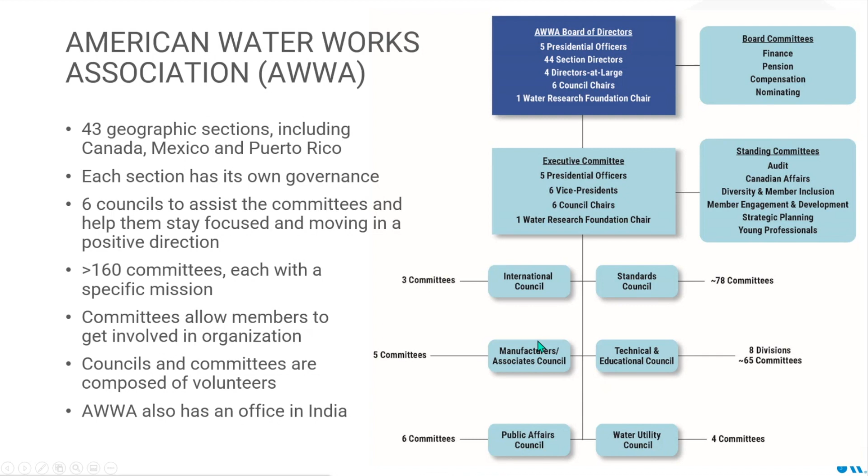We have the Water Quality Division and the Water Science and Research Division. The committee is actually shared between those and reports to both.

AWWA committees are there to develop what we call work products. It's an opportunity for AWWA members to be involved as volunteers. What we do is prepare conferences, workshops, sessions, webinars, webcasts, and also journal articles. AWWA has three publication venues.

It has Water Science, which is peer-reviewed. The Journal of AWWA is perhaps the oldest one, but is no longer peer-reviewed, so it covers broader topics. And Opflow is also not peer-reviewed, and it's more at the operator level.

AWWA also develops manuals of practice. These practices are a comprehensive review of a specific topic. I pulled one out here—this is the Water Quality in Distribution Systems manual, M68, and this one we're going to start reviewing pretty quickly. It's a pretty decent manual, actually. I think this one turned out to be about 400 pages, if I'm correct.

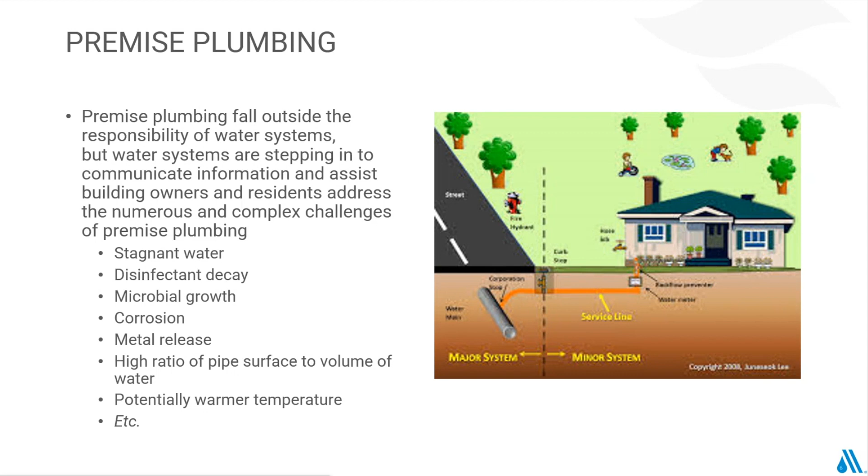But water systems are going to feel compelled to help building owners and residents address the challenges they encounter in their premise plumbing. We know these challenges are multiple, including corrosion, microbial growth, metal release, and so forth. To address this, AWWA developed a policy statement and started the Committee on Premise Plumbing.

You can access the policy statement here. It was adopted fairly recently, and it basically emphasizes collaborative work among everyone and the organizations responsible for ensuring water quality in premise plumbing. It's also there to encourage water systems to inform and educate property owners and water consumers.

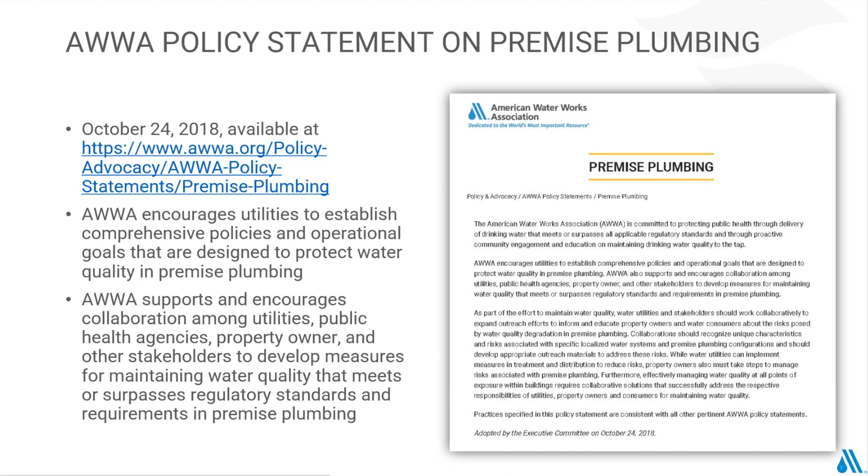The Premise Plumbing Committee was the second thing that AWWA did, and we had our first meeting almost 4 years ago. We have over 120 members right now representing different parts of the industry. We are at our second version of the mission statement: to synthesize industry knowledge and convey information that improves building water quality.

Some of the topics we have addressed are how to control pathogenic microorganisms—Legionella, of course, was the first one we worked on. We also look at improving control of inorganic contaminants in premise plumbing, how to remove accumulated inorganic contaminants, and how to address water quality in hot water systems. This is something we're starting to look at.

How do we handle premise plumbing, recognizing that it falls in the part of the system that is not owned by water systems? During the COVID pandemic, we also got quite active looking at what's going to be the impact on change in water flow in buildings, considering the work from home moratorium. So we developed some work products as part of that as well.

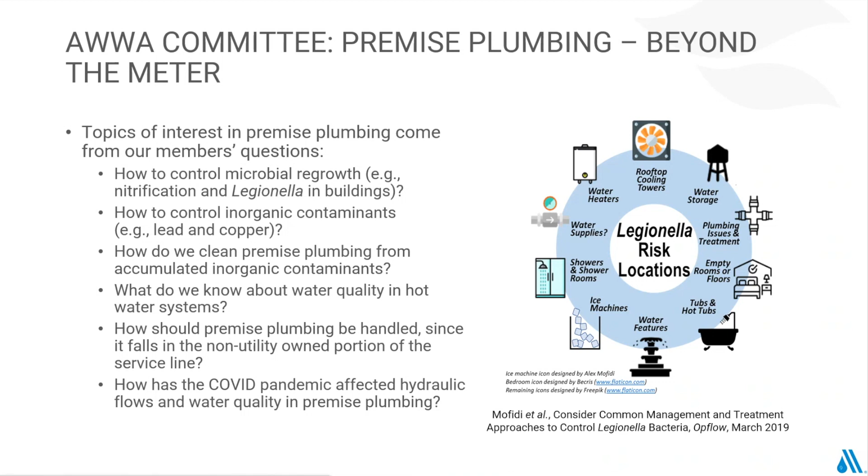I'm going to go over some of the work products we've prepared. One of the first things we did was a suite of 3 articles in the Opflow publication, which is more geared toward operators. They were published in early 2019, separated into preventing diseases and addressing the shared responsibility, looking at management and treatment, and also unintended consequences for Legionella growth.

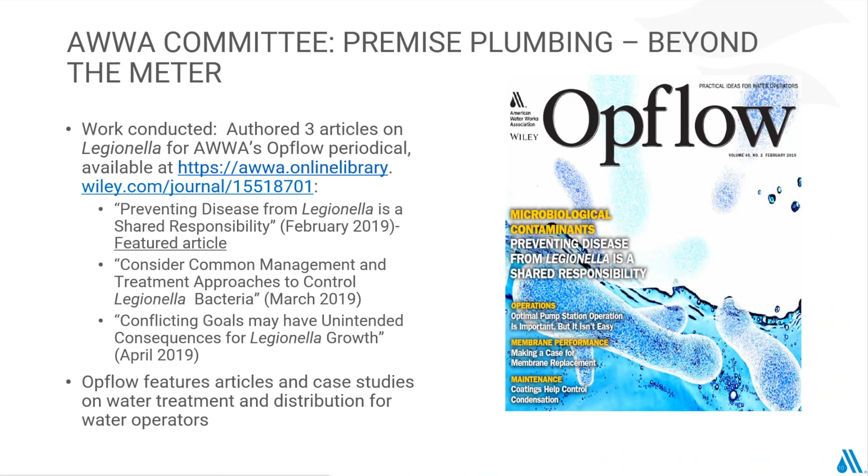Interestingly, AWWA actually won an award for this suite of 3 papers—the Apex Award, given to them in early 2020.

Something else we've done is at 2 of AWWA's annual conferences, which is AWWA's biggest venue, with about 10 to 15,000 participants—fairly large conferences. What we did is started as poster sessions, but we made them like lightning round poster sessions.

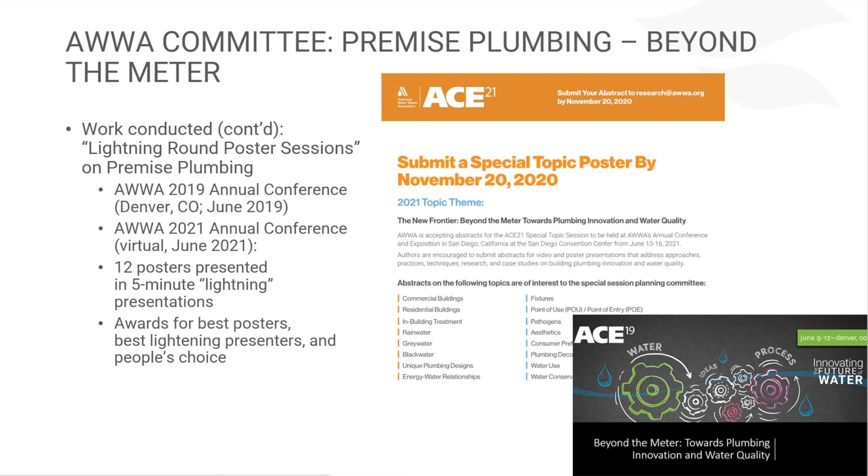We had a fairly large number of posters, but we selected 12 of them that were also allowed to give a 5-minute presentation about their poster with a Q&A session. That was quite interesting, and we gave awards. It was very interesting, especially for students and young professionals, and was well attended.

We have a number of subcommittees or work groups working on very specific topics that pertain to premise plumbing. The lead in water subcommittee was the first one created. The copper in water subcommittee was also created, in response to the revisions of the lead and copper rule.

To the right here, you see some pictures of a paper published by the Copper in Water subcommittee earlier in the Opflow magazine. The Lead in Water subcommittee is also going to have an article coming out in the January issue of the Journal AWWA.

We also have a subcommittee looking at building disinfection. Another subgroup of the committee worked with IAPMO to develop a manual on safe closure and reopening of building water systems.

We also have two groups starting to look at building water system operator certification, evaluating if this is needed, what is happening elsewhere in the world, and if needed, how do we go about developing such operator certification—what would be the advantages and what would be the drawbacks. That's another thing we're working on right now.

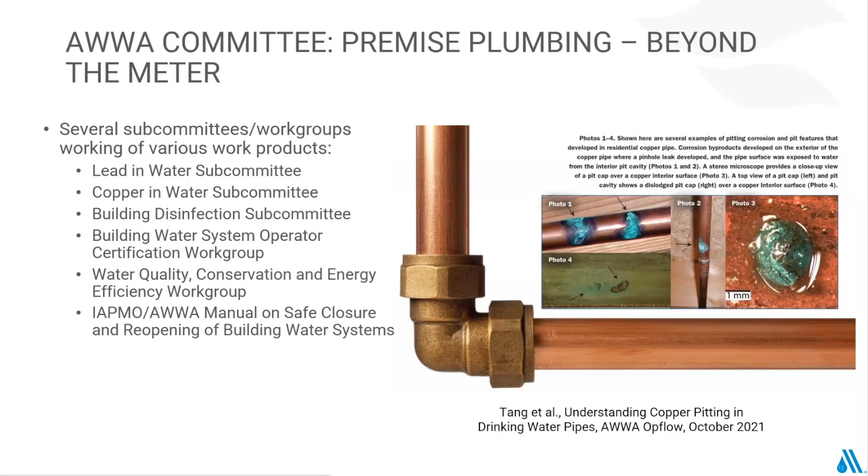We are also reaching out to other organizations to look at the nexus between water quality, conservation, and energy efficiency. There are a lot of organizations working on each of these topics separately. Some are starting to tackle conservation and energy, but oftentimes the water quality aspect is dropped out of the equation. So we want to make sure this stays on the radar screen of those groups, and we're engaging in discussion with some of these organizations.

Our committee actually meets every other month, so we have about 6 meetings per year. We try to have a guest speaker at each committee meeting, and most of the time we are able to have one.

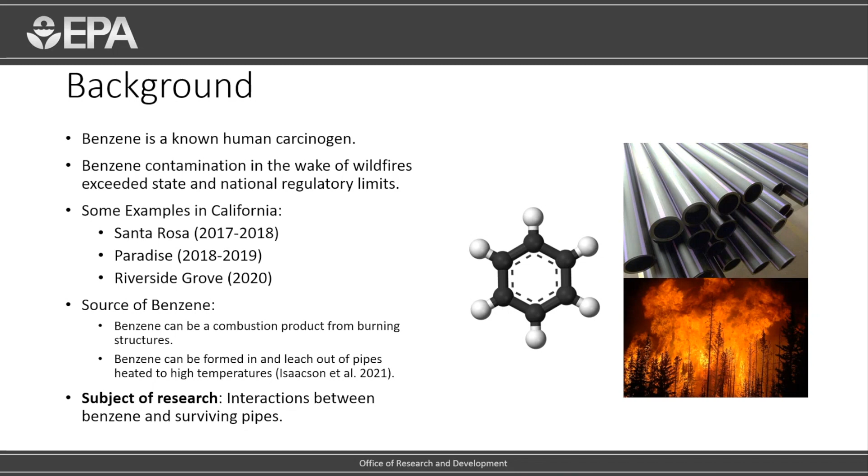But that's not really the focus of my presentation today, which is what does the benzene do, how does it interact with plastic pipes once it is in the system. One of the things that benzene does in contact with polyethylene is that it permeates it like the polyethylene is a sponge. Benzene doesn't just stick to the surface, it actually penetrates the polymer of the pipe wall. A benzene molecule can conceivably wiggle its way through the polymer strands all the way from the inner surface to the outer surface of a polymer pipe.

Why is that important for premise plumbing? Well, for instance, service lines are commonly high density polyethylene, and a lot of internal building plumbing now is cross-linked polyethylene of various flavors, called PEX.

Some of the consequences of this benzene diffusion into the polymer is that this process is kind of slow compared to, say, remedial actions like rapid flushing. That means a quick, couple-minute flush can strip benzene off of the surface of the pipe, but there can still be a considerable amount of benzene deep inside the pipe wall waiting to come back out.

As a corollary to this, besides just affecting decontamination, this also affects sampling because, for instance, if one were to draw a sample from a pipe that was just recently flushed, that sample might come back non-detect, even though there might still be plenty of benzene left in the pipe.

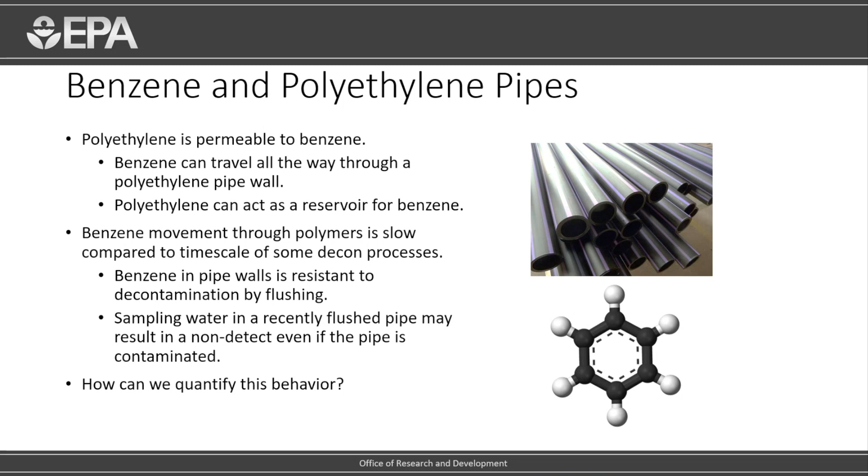So is there a way we can talk about this behavior more precisely? Recently, we've been doing some experiments at the testing and evaluation facility at the EPA with sealed pipe segments, which isn't really representative of a distribution main out in a system which is constantly flowing. But in a lot of places in premise plumbing, or even on the service line to premise plumbing for sparsely or periodically populated buildings, which were and are sort of common during COVID, we can do experiments with sealed pipe segments like the one pictured here.

The gist of the experiment is to fill up the pipe with some contaminated water and let it set for a couple of weeks, which is what might happen if a community is scorched by a wildfire, or if some contaminated water enters a building that's been evacuated.

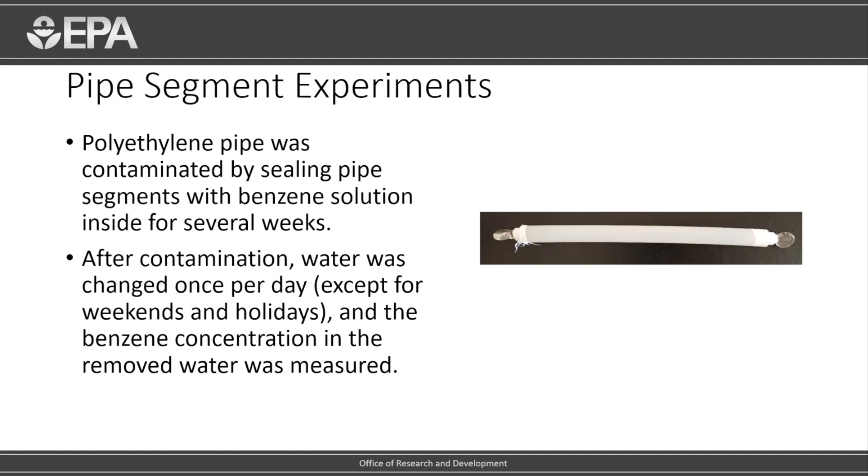After this contamination period, the contaminated water was removed from the pipe, and then pretty much every day, except for weekends and holidays, we filled up the pipe with fresh water and let it set for a day or a weekend, then discarded the water, rinsed it, and captured the water inside and measured the benzene concentration. So the first result I want to talk about is the difference in benzene uptake between a stainless steel pipe and a high density polyethylene pipe.

At the end of some weeks of absorption, of contact with the pipe, like 8 weeks, the decrease was only 4% for stainless steel. So is there absorption, or maybe just a little bit of volatilization? Either way, not much of the benzene went out of the water.

Contrast that with a high density polyethylene pipe, which absorbed most of the benzene that was in the initial contaminant solution.

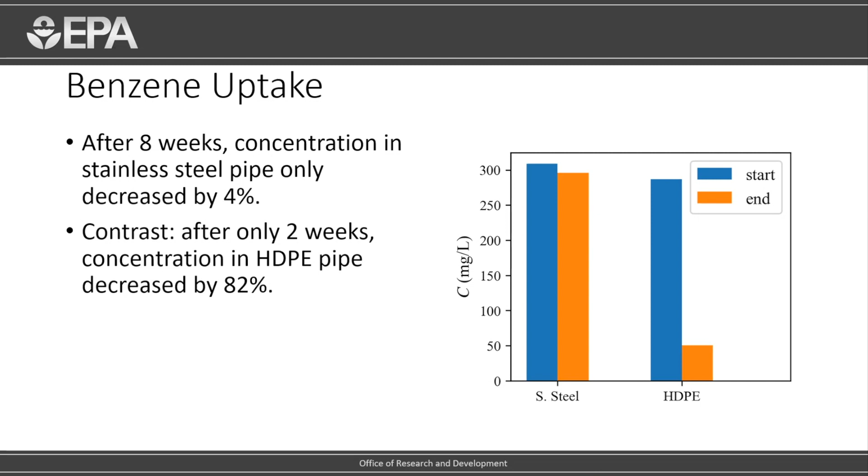So then what did the sequential stagnation and extraction curve look like? Well, there was practically zero desorption from the stainless steel pipe. However, there was plenty of desorption from the high density polyethylene pipe.

You can see even after like 15 rinses, we're still above 400 times the federal MCL on this particular pipe. Granted, we started with like 20% of the aqueous solubility of benzene, and the wildfire samples were only, I think the biggest sample I saw was in the 2 to 5 milligrams per liter range, which is still a lot compared to the MCL.

But you might be wondering why this plot here for the HDPE is so jagged, and that is the difference in time period for how long the pipe was in contact with the water, how long the extraction was. For instance, those peaks correspond to weekends where it was set for a couple days, and you can see that time period, over the course of days, allowed more benzene to leach out of the pipe than the 1-day data points.

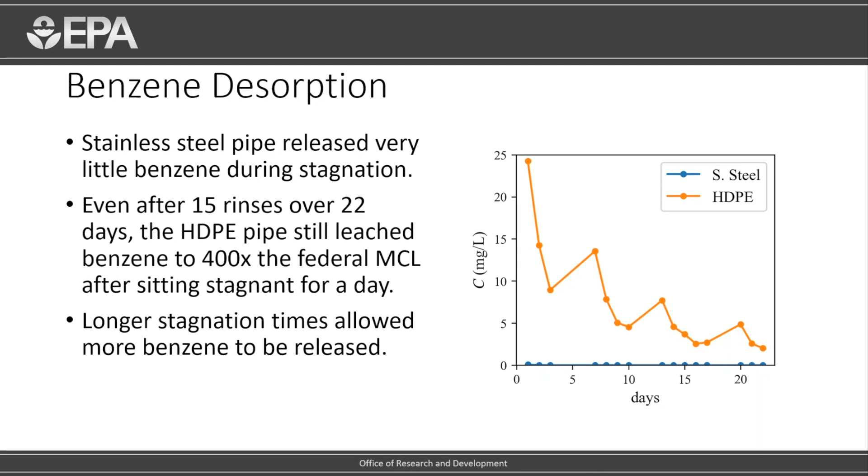That's just an illustration of how the slowness of the desorption of the benzene is going to complicate sampling and decontamination.

So just how much and what kind of complications? Well, we do have a benzene desorption model developed at the EPA that we published, I think like 2 years ago, for toluene, when we were looking at industrial backflow incidents. But we can apply the parameters from the literature, notably a paper by Feng Mao and others, where they looked at and fit the critical parameters like the diffusion and partition coefficient for benzene in actual high-density polyethylene pipes.

Just naively putting in those parameters and not doing any regression, you can see that the agreement between the desorption model and the experiment is pretty good. Granted, there are a lot of other materials out there besides HDPE, but there is a lot of HDPE out there, so we can use the model to make some predictions.

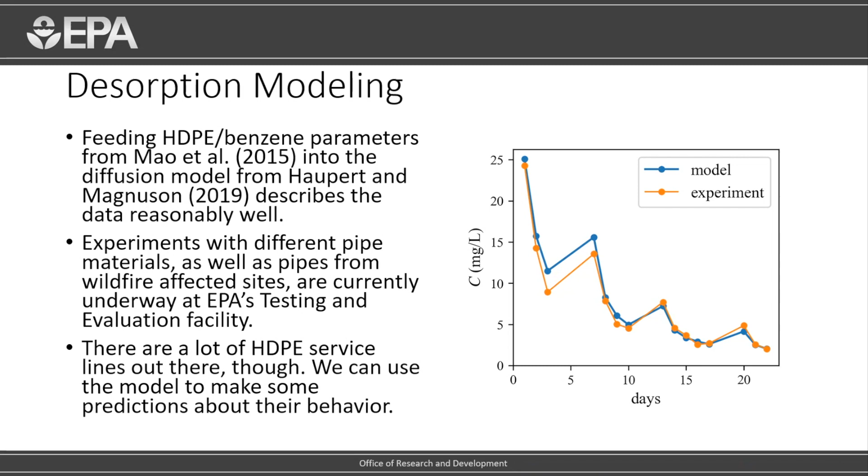To make predictions, the history of the pipe matters, so we have to come up with a history, for instance, pipes contaminated during a wildfire. This was to address a request from EPA Region 9. During the first phase, the contamination phase, is when the benzene is in the pipes and the firefighting has basically stopped and the site is evacuated.

The benzene in the contaminated water, however it got there, begins to be absorbed by any plastic it's in contact with. But then eventually people will return to the site and flush out the pipes and see what's working and what's not. So usually the initial flush, nobody measures the concentration then. So this concentration C1 usually isn't measured.

And the initial concentration, pretty much nobody knows that, because the town is on fire when or shortly after that happens. So usually the first concentration you would get from the field would be this: after the first flush, there had been some stagnation of the pipe, and then a sample is taken eventually. So you have some stagnation period, somebody noticed it, eventually some pipe is measured somewhere and you get this concentration C2.

Then once it's observed that there's a problem, there will be some remedial action, like flushing, and then afterwards, probably another stagnation and a sample. So the goal of the model then is, given this timetable, how long, for instance, would you have to flush to get that second concentration, C sub W, to be within a specification.

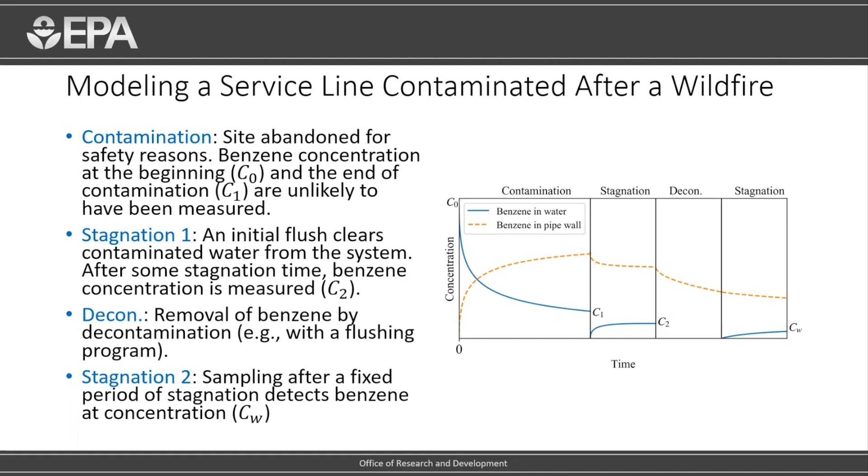So what you would need besides just the timetable would be a decontamination goal, like how clean does the pipe have to be. One complicating factor is it's difficult or impossible to measure the benzene concentration in the pipe wall directly. So the decontamination goal is usually some specification based on the water inside after a period of time. And then the other things the model would need would be pipe diameters.

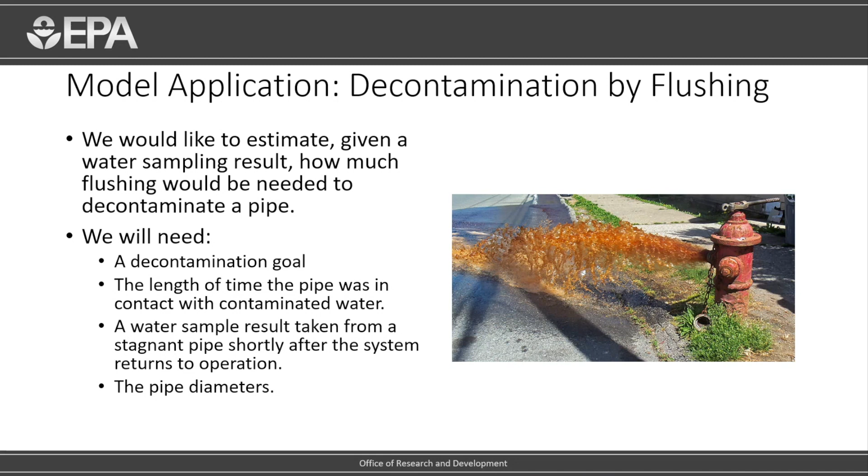So here's an example of the kind of model application I'm talking about, which relates that first stagnation measurement to, for instance, the goal concentration, which might be the California MCL of 1 microgram per liter. So our definitions of decontamination success: one might want the pipe to be clean enough that it would never contaminate the water above this level, no matter how long it's sat stagnant.

Or we had one tech support request asking how long would it take to just say it's good enough if the pipe doesn't contaminate the water above the MCL after up to 72 hours. So I plotted those two curves here. You can read this as: if that first measurement was 20 times the goal, it would take about 70 days of continuous flushing even to make this 72-hour goal. This assumes the pipe was in contact with the contaminant solution for like 12 weeks and for a 1-inch service line. You can use curves like this to inform cost-benefit analysis, comparing against, say, pipe replacement.

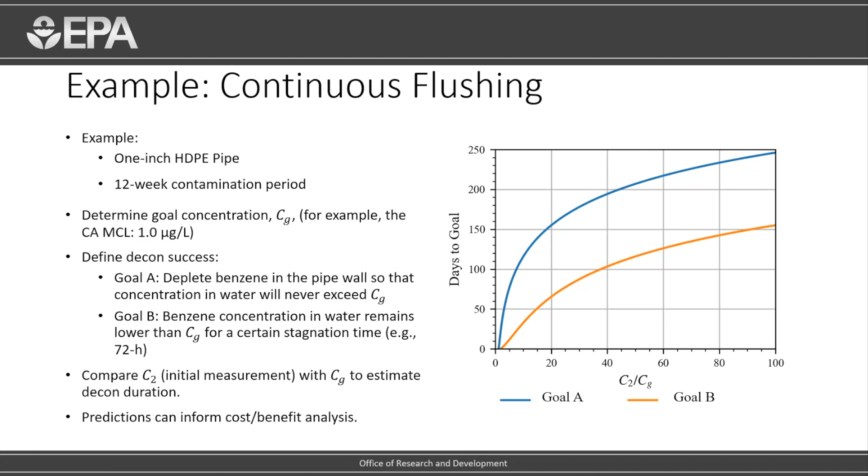Another option we explored with the model was using intermittent flushing rather than constantly running water, because constantly running water for 70 days is a lot of water. So we looked at flushing the system a little bit, like once every 3 days or once per day. You can see on the curve here you're saving like 98% of the water in either case. And the once-per-day flushing is actually not that much more overall decontamination time than running water continuously.

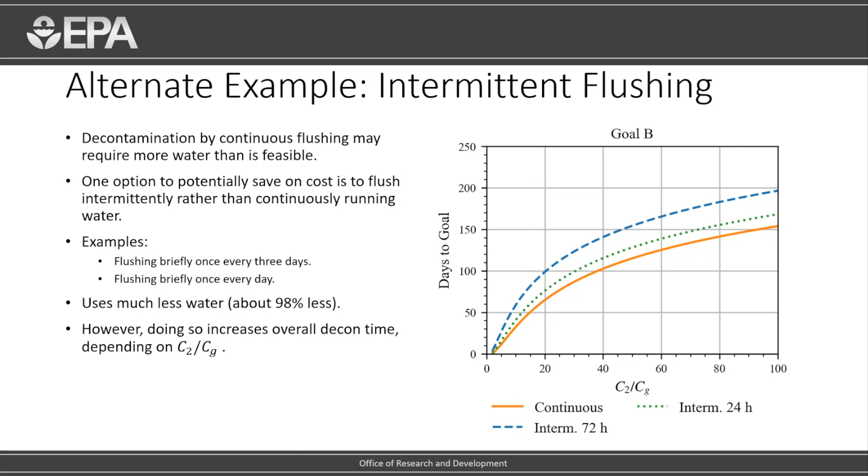So now that we've looked at decontamination, we should probably talk about the flip side of decontamination, which is sampling. You won't know if any decontamination is successful if you don't sample it.

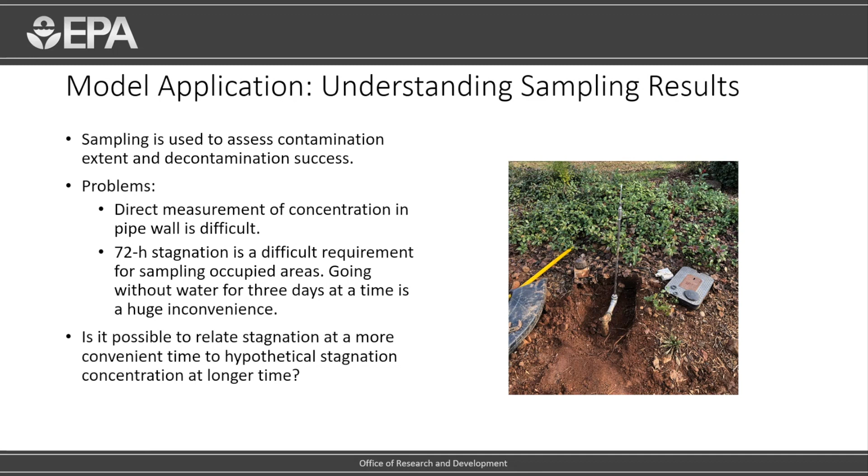One of the model applications here: a 72-hour stagnation period is a difficult ask for, say, an occupied structure, to not run the water for 3 days. So we had a tech support request from Region 9 to see if we could use the model to relate a shorter stagnation, like an overnight stagnation, and predict what would happen had that sample sat for 72 hours in the pipe. We were able to do that for a 1/2-inch pipe.

This is just an example of how to use the model for this particular case. If you have a different contamination contact time or a different pipe size, you would want to rerun the model. It turns out that how much the overnight stagnation relates to a 72-hour stagnation depends on how long it's been since the water was last used, or how frequently the water was used. In this legend here we have the use interval - how frequently the building runs water versus how much it's stagnant.

If the building's only using water every 3 days, then the 72-hour stagnation is only about a factor of 2 greater concentration than the overnight stagnation measurement. So the overnight stagnation here would be fairly representative, within a factor of 2, of the 3-day stagnation. Whereas if the water is used really frequently, it's more like a factor of 5 difference between these two sampling strategies.

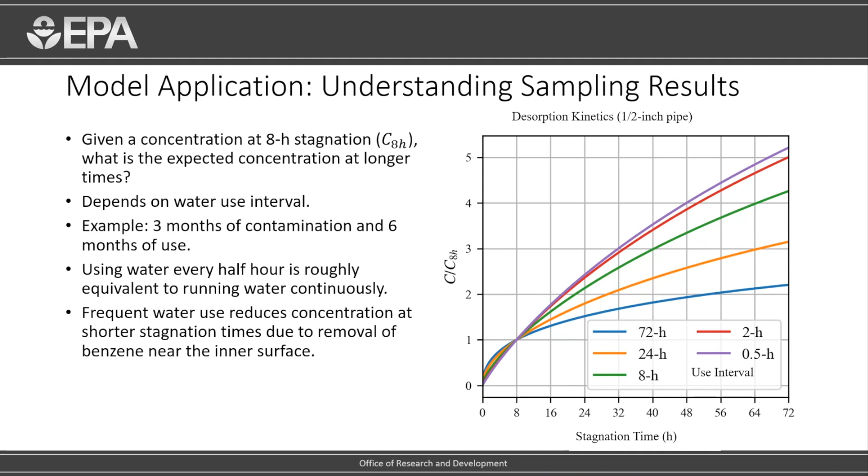So yeah, sampling can get pretty difficult, but there are some things we can do. Of course, this is all just for standard off-the-shelf HDPE, and we have ongoing experiments in the works to look at whether the age of the pipe matters, whether the manufacturer of the pipe matters, and what parameters we need for cross-linked polyethylene, or there's still some polybutylene out there. These are the subject of some ongoing experimental research at the T&E facility. I pictured here some good pipe samples from Paradise Irrigation District that were shipped to EPA by the California Water Control Boards.

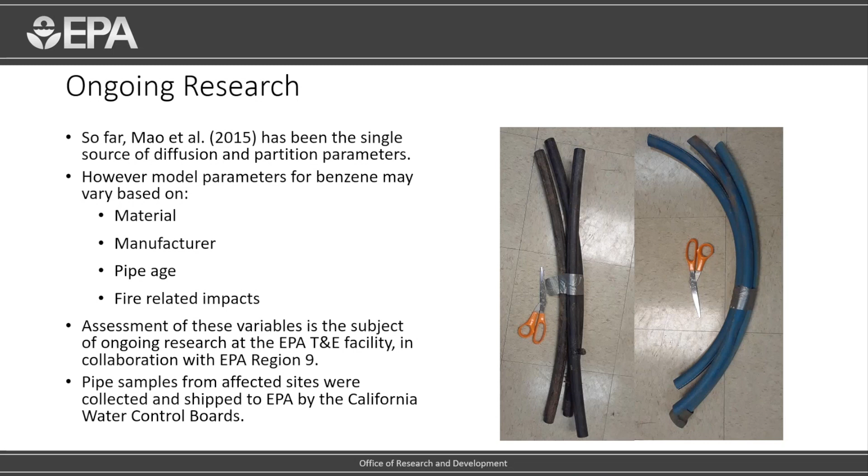Just a few important notes before I close.

So we can apply this model to sort of rubbery polymers like the ones I've mentioned so far, but for rigid PVC, like the glassy polymer, it's white and pretty common in premise plumbing, but it has sort of weird diffusion behavior in that it's resistant to benzene up to about 1,000 milligrams per liter, which is above water solubility in a lot of cases. So usually it would take some kind of droplets or some other kind of solution to really start to bloat out and plasticize the rigid PVC.

However, it's just not really characterized how this sort of assumption holds up at fire-affected sites. So that's one thing to keep in mind.

Some other things to keep in mind: our model is pretty simple. It doesn't include things like microbial action or leaks, and it doesn't have explicit temperature dependence, so you would have to measure parameters at whatever temperature you need.

And one of the more interesting outcomes that's been noticed at some of these fire-affected sites is pictured here - this photograph from Paradise Irrigation District, where there's a bunch of melted plastic inside this other pipe. So conceivably, if there's a bunch of melted plastic that got sucked into the system, even metal pipes could become a reservoir of benzene - a melted pool of plastic inside a metal pipe could be a reservoir for benzene.

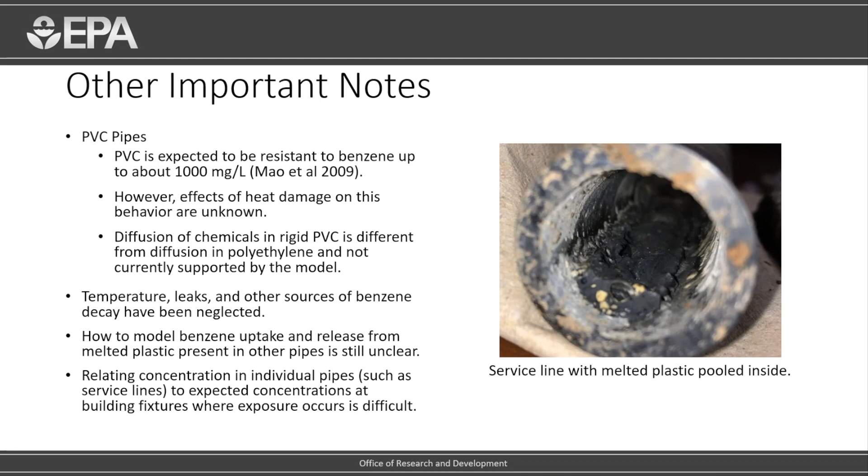And so for other resources to check out, for more information about contamination in drinking water with VOCs following wildfires, the Office of Water has put out a fact sheet that you might be interested in.

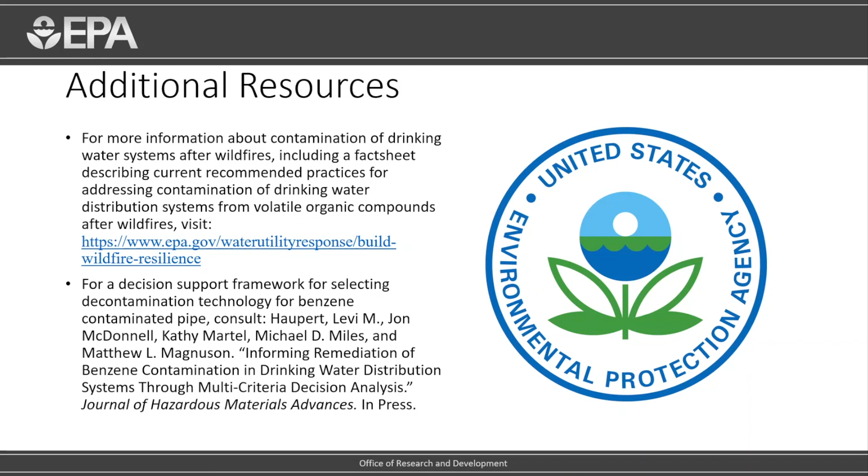And then for determining the best guidance for selecting decontamination technologies, for instance flushing with a surfactant or pipe replacement, we recently published a paper in the Journal of Hazardous Materials Advances about using decision support tools to help with that.

And that's all I have. Thanks for attending, and I appreciate you listening to my presentation today.

Thank you very much, Levi. It's an excellent presentation. Appreciate it.

So, okay, and then the third one will be our committee's premise plumbing modeling task committee brief progress report so far. As you may remember, thank you again for all your participation today, as well as for all those who contributed for the success of our task committee.

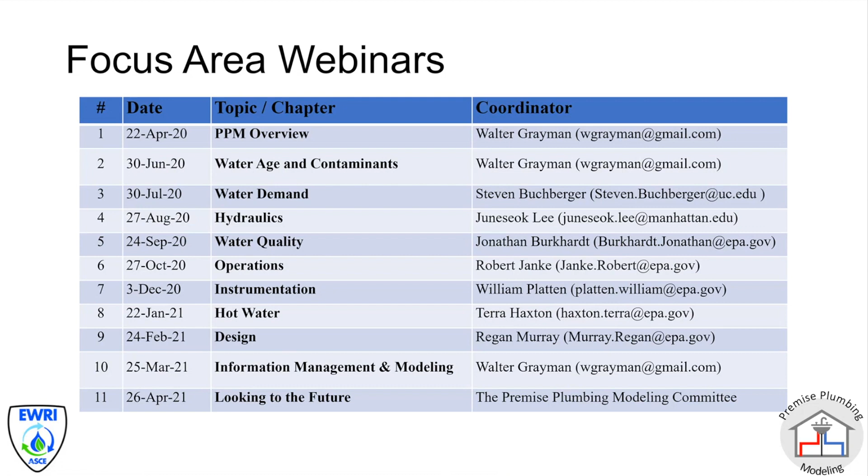Since April 2020, we did a number of focus area webinars, starting from water age contaminant, water demand, hydraulics, water quality, operations, instrumentation, hot water, design, information management, and modeling. And we concluded with looking to the future. The last webinar was during April of this year.

As you may know, all our webinars, including today, will be available on our YouTube channel. And throughout over a year of our collective effort, we've had the great pleasure of having over 40 plus speakers - 14 from government agency, academia, consultancy and industry, and also 28 from US and 14 from international. It was a great eye-opening experience, sharing excellent ideas. It was a great opportunity for all of us.

So our major deliverable - most of the speakers, we've had great conversations with all of you - now we are in the process of working on a state-of-the-art review book focusing on premise plumbing modeling. Here's our tentative outline of the book we're working on. Our plan is to publish it during August of 2022 under ASCE, American Society of Civil Engineers.

Briefly: section 1, intro; section 2, hydraulics and water quality process; section 3, design and operations within premise plumbing systems - so design, hot water operations and demand; section 4, modeling and monitoring in premise plumbing systems; and then concluding with the future perspective.

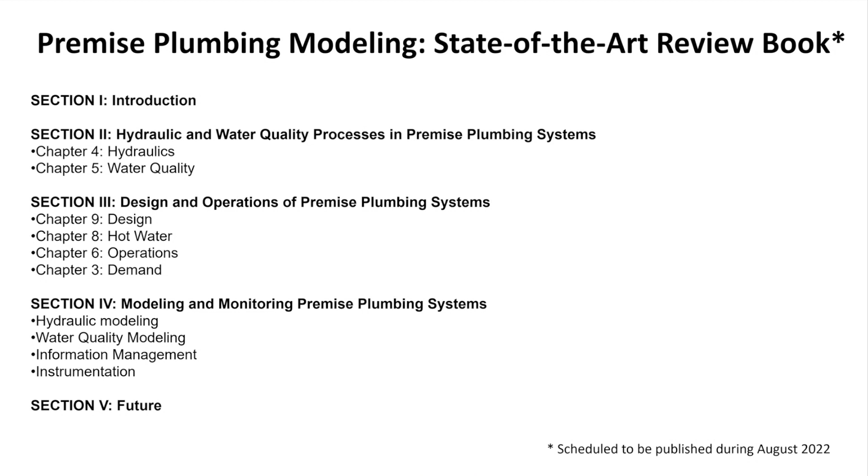And as mentioned, this is an open committee today, so we would like to hear your thoughts and feedback about our future directions, in an open floor manner. So let me quickly stop presenting now.